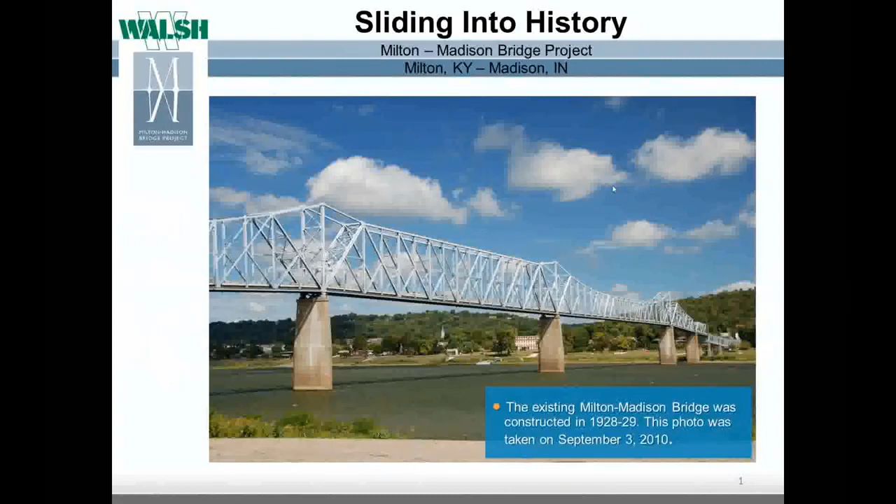As we all know, this was the existing bridge built in 1928-29. We've all seen this picture, but I left it there because I'm going to have an updated one at the end here.

What a way to start a project. We began the project in December of 2010, and it turned out that 2011 was the wettest year on record along the Ohio Valley. The project experienced 8 flood events in the first 14 months, and Walsh lost approximately 240 days to high water conditions. Normal pool was right around 420. For the contract, ordinary high water or a flood day was set for 432.2. And this picture right here was our highest water level, which was Easter of 2011 at 456.

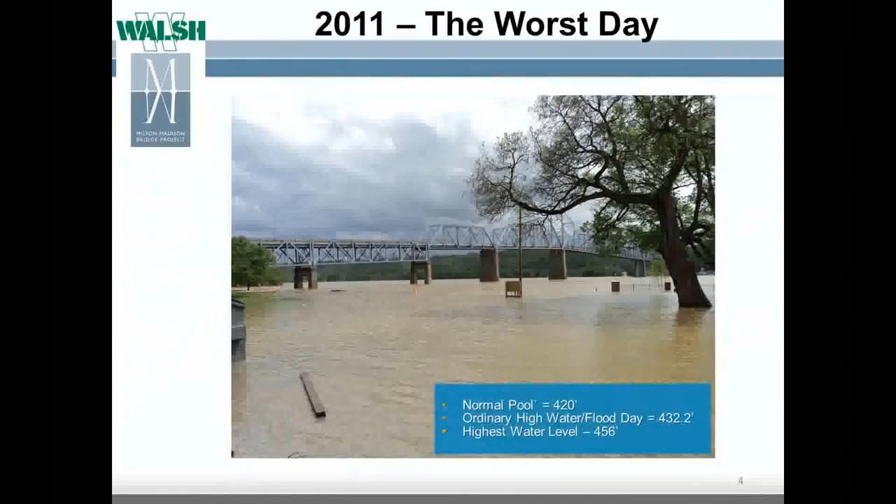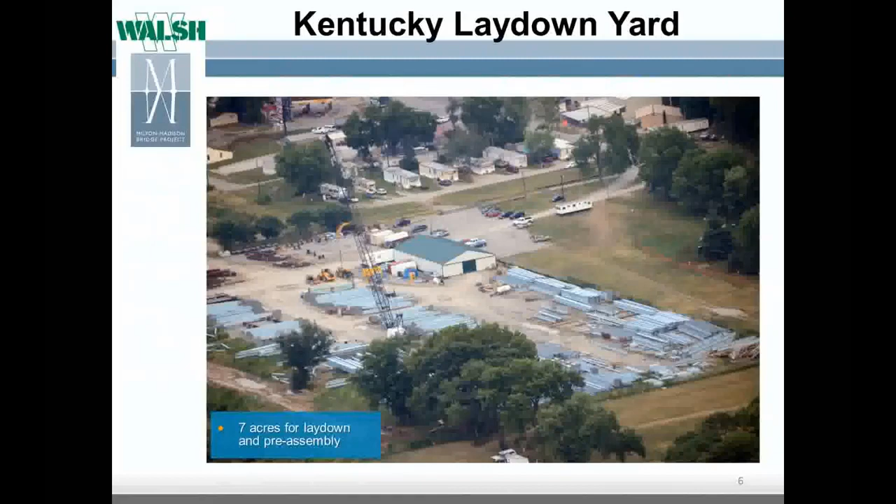We've seen pictures of the cofferdams in the previous presentations. Because of the limited headroom, we could only drive sheets that had a top elevation of 435. So if the water was coming up and we knew it was going to continue to rise, right around 430 was when we had to take our equipment and flee it until the floods receded. So we were limited somewhat by the height of the sheeting as well as the flow of the river in our working.

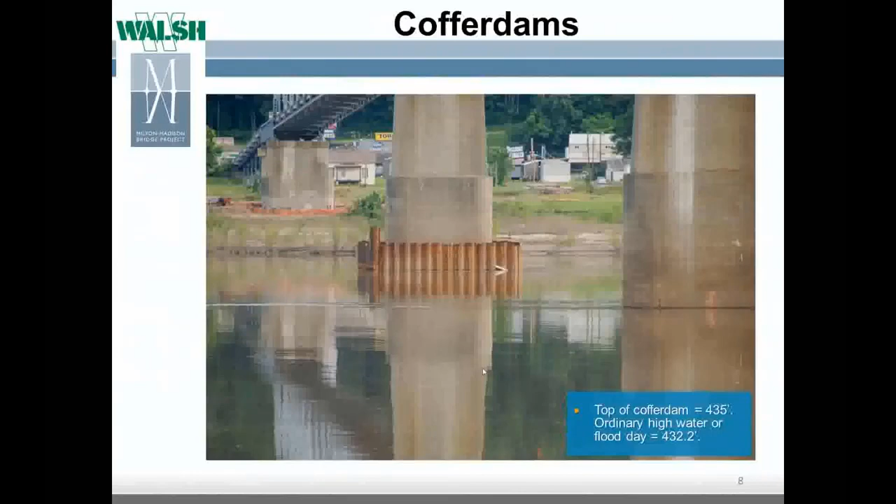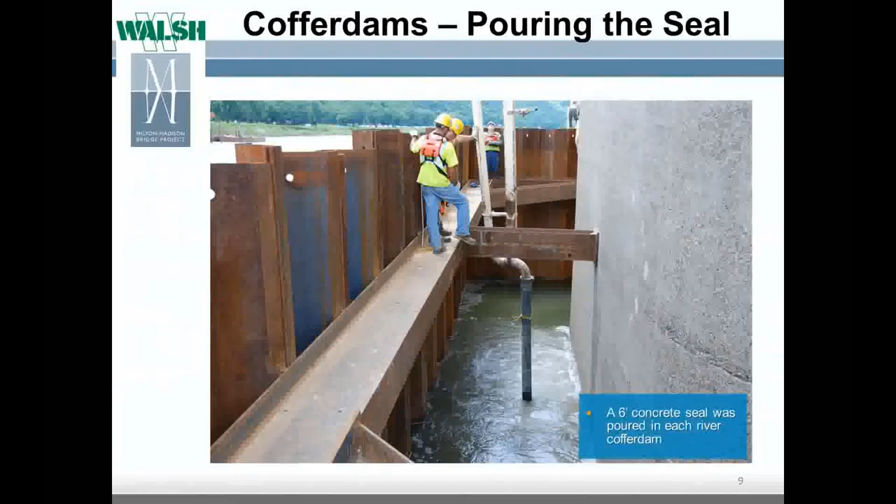So we actually had to set up a test. The test was specific to the contract. But what we found was unique: no one in this part of the country had ever tried to pull a bundle of bars—single bars, yes. So we had to reach out and get some specialty wedges built in order to pull a bundle. We were also told by the grout supplier that in order for the grout to have the necessary strength, we would have to roughen the edges of the hole, which did not sound like a cheap proposition. During our testing, we roughened some holes and left some slick from the coring, and as it turned out, there was no difference in the bond strength between a roughened surface or a smooth surface.

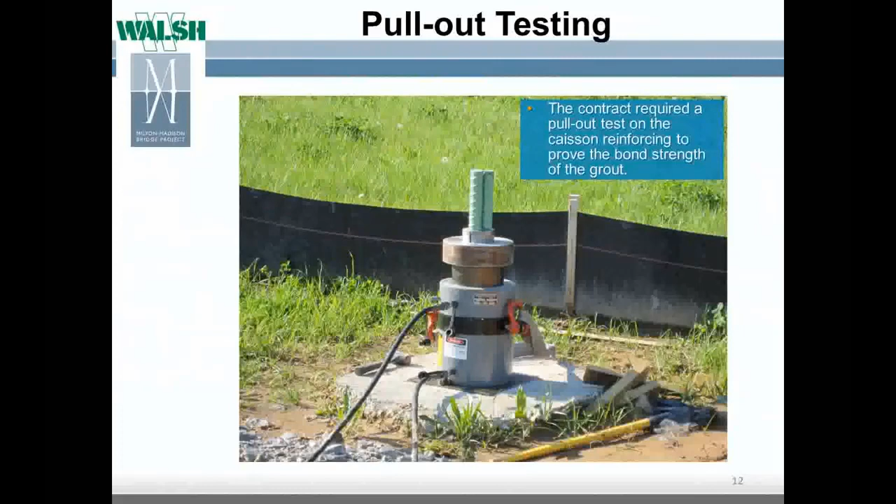This was mentioned earlier by Travis, the number 7 epoxy-coated resteel shear connectors. There were over 7,000 of them drilled and anchored in the existing piers that were strengthened. Also talked about the reinforcing steel—a couple of pictures of what the steel looked like in application.

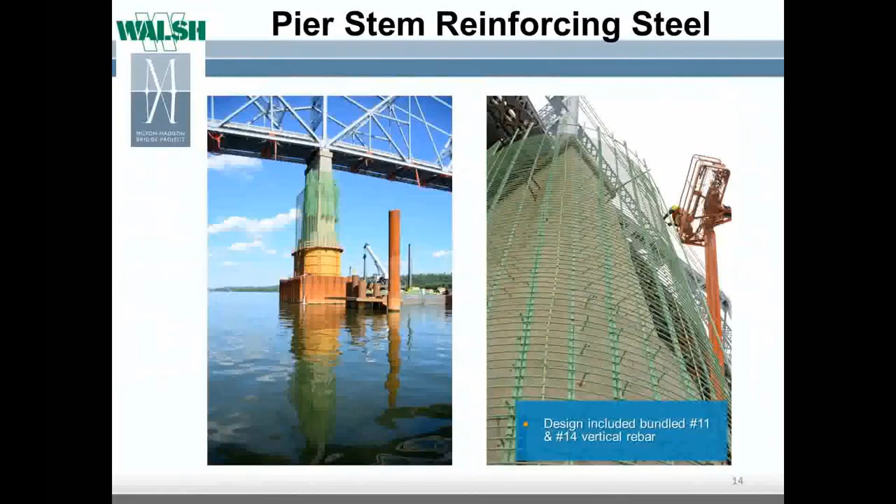Our forming system was an EFCO forming plate girder system. We poured 20 feet at a time, and each time we would break it apart, clean them, and then jump them up.

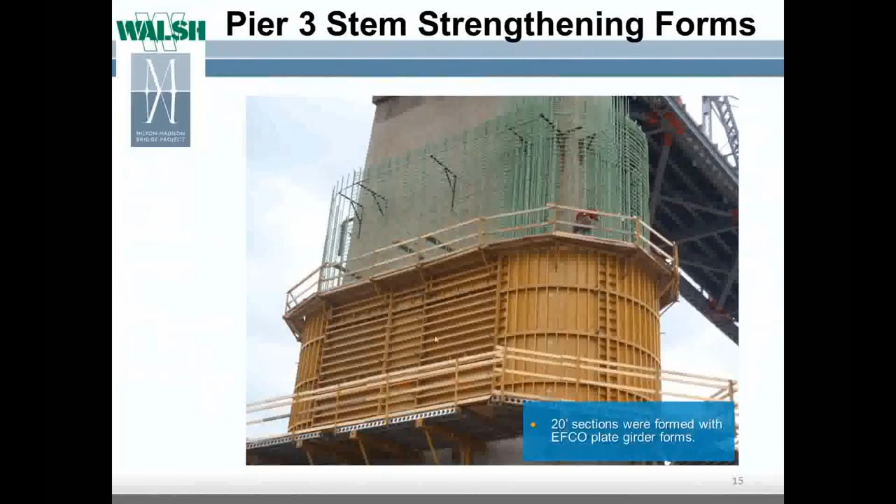Once the concrete got more than 4 feet thick, we were obligated by contract to use mass concrete thermal control measures to monitor the cure of the concrete as it related to heat distribution.

Here's a picture of a completed pier with the pedestal steel standing tall above it. The concrete thickness varied in the jacket from 2 foot to 6 foot.

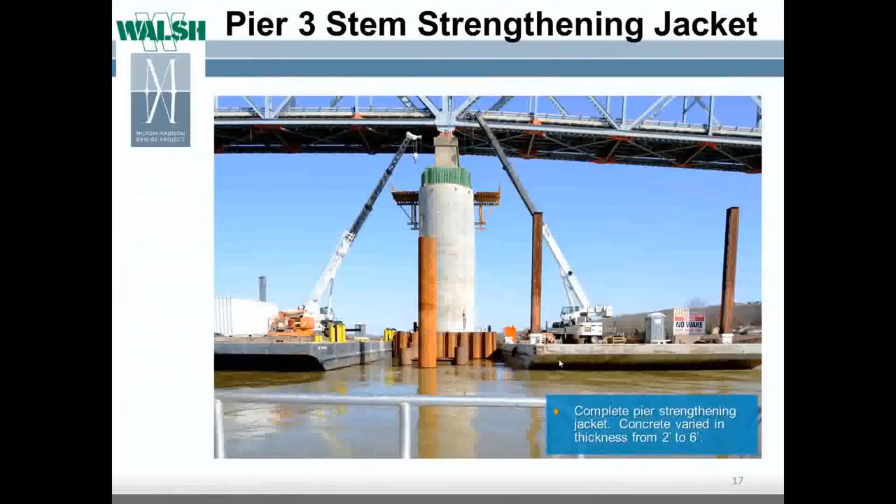Travis talked about the temporary ramps. Here's a good cross section of what the ramps look like. To expound a little bit on how these were anchored to the beams, we use a standard carriage bolt and what they call a lug C washer, which is bent in such a manner that you can reach through the timber and grab the flange of the beam below it.

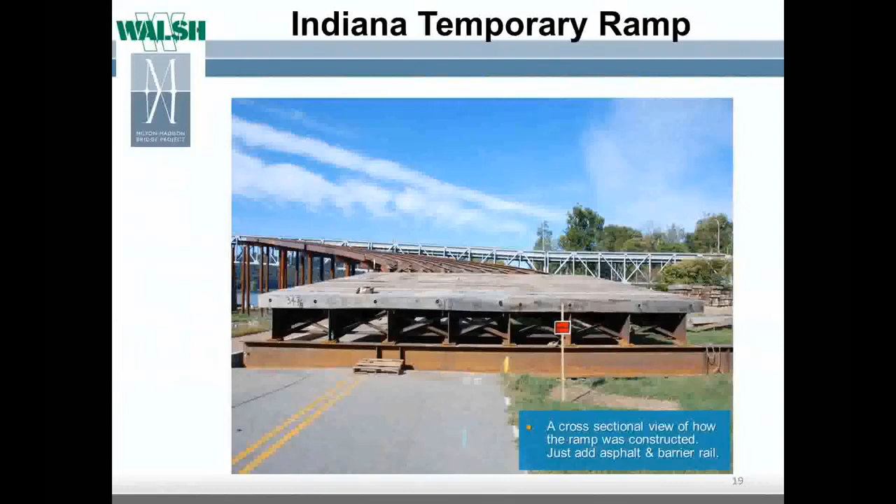They're used for docks mainly, and they held quite well. Just another view - we use 24 and 28-inch pipe piles to support it, and you can see the stringers underneath.

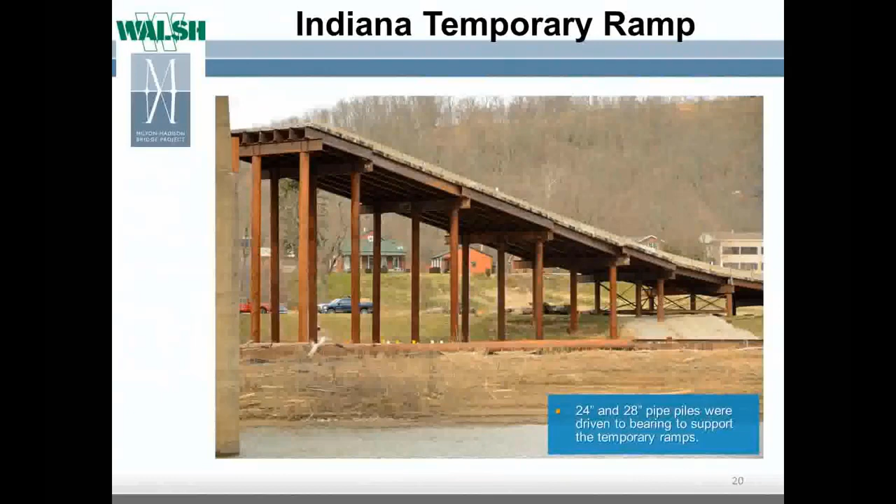Just another view prior to paving that section of it. And portions of the Kentucky temporary ramp was an earthen fill.

One of the key elements of our first closure to connect these ramps was getting sections of the old approach spans out of the way.

In order to expedite the installation of the remaining section, we actually drove the support piling on the outside, and you can see the piling right here that will accept the cap beams for that section that remains to tie the ramps to the old truss. We hurried our demolition contractor along to remove the deck off this portion.

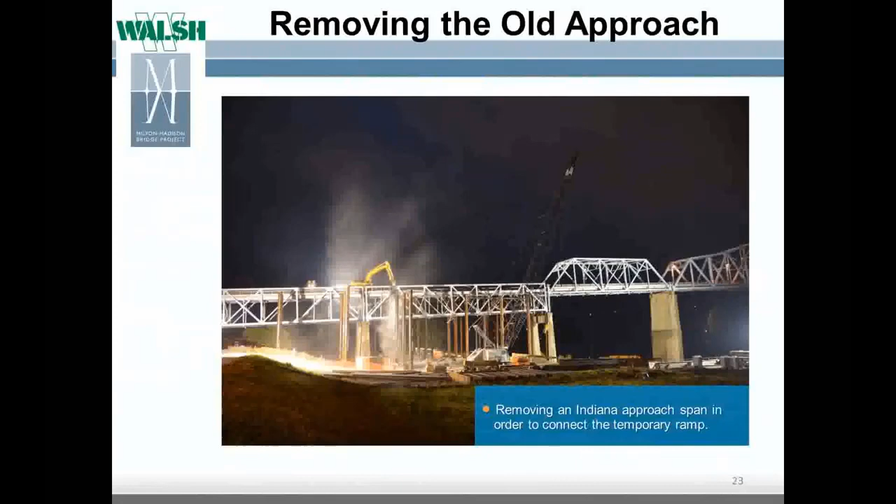You can see him shortly after midnight of the night we closed it, hammering the deck down. And then the next day, about 1 o'clock, we actually had that section fired and dropped. The demolition expert dropped it straight down, it did not hit any of the piling, and that allowed us to go right to work on setting the cap beams.

Travis used this picture previously, but we had to install the cap beams, the stringer beams, timber mats, concrete barrier, and place the asphalt. We did this, and the closure was only 3 days before we could put traffic back on the existing bridge.

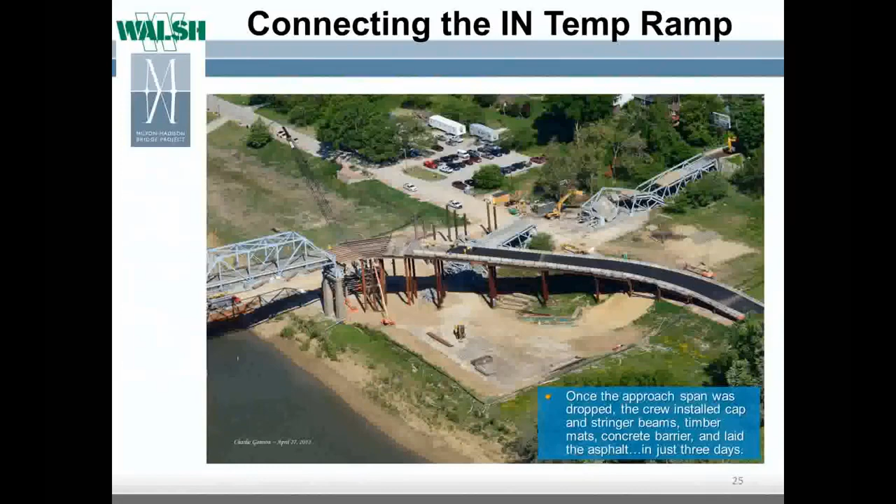Here's a picture of the work on the Kentucky side showing the installation of the stringers. There'll be sections coming back this direction to complete this.

We finished asphalting in a heavy rain at midnight in order to get it done without being charged a 4th day. It was prom night too, and the people in Kentucky were happy they didn't have to drive over an hour to get the kids back home.

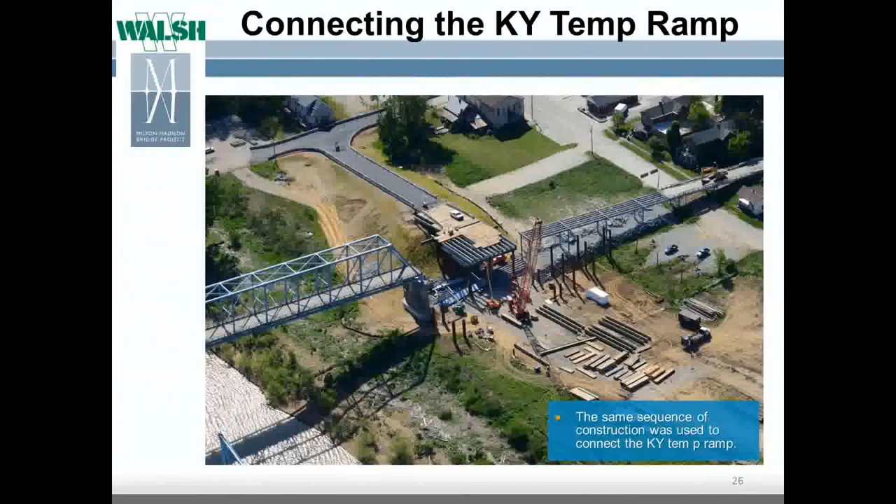We had weekly maintenance where we kept bolts tightened and checked for any other issues. But the ramp system worked very well.

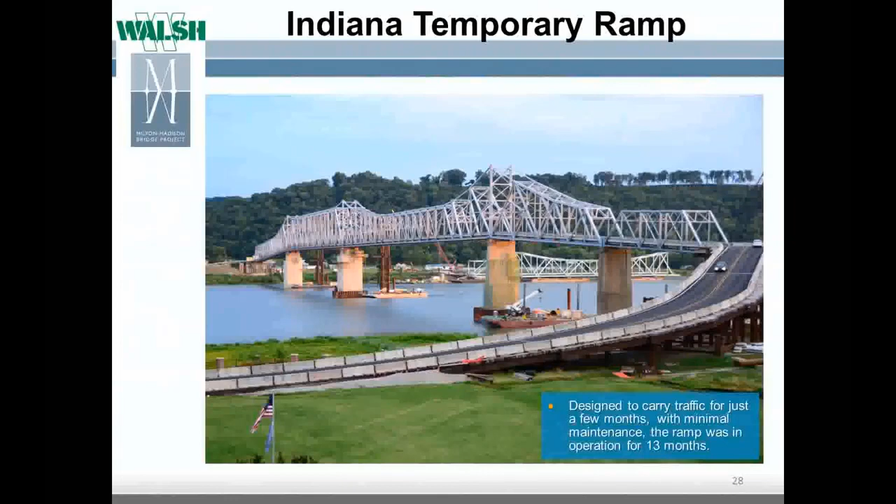During that time, we began the pre-assembly of the truss. Part of that was lashing big jumbo barges together and setting up what is called a grillage system to support the truss. It was very important that everything was surveyed in to be exactly within a quarter of an inch to allow the truss to be properly assembled.

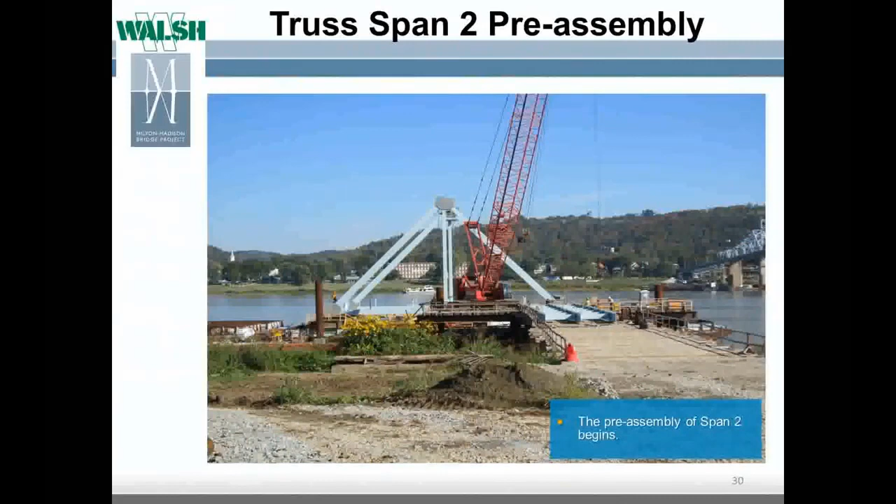The crews did a very good job with this. This is a shot of the first section of span 2 being assembled on the barges, and we fed that operation by some float trailers within the yard.

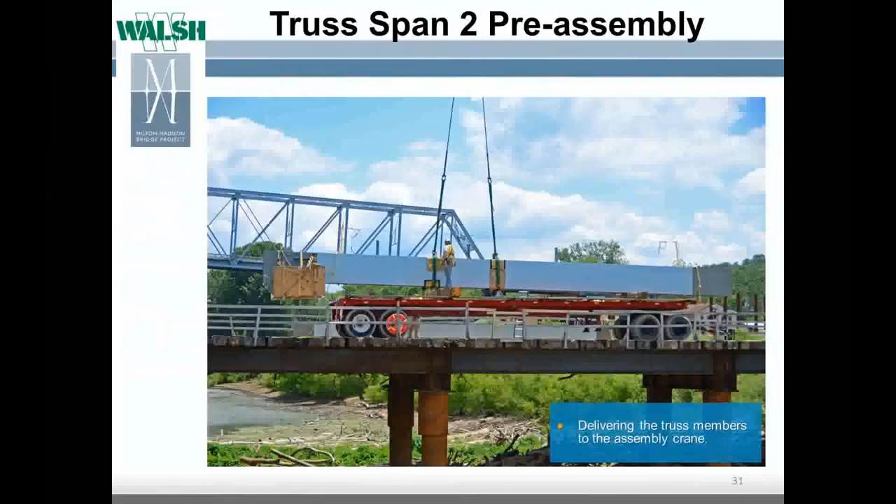The next members we loaded up and pushed out using a big loader to move the float trailers into place. Just a point along the way of span 2 being assembled. For the most part, we used aerial lifts setting on the barges for the iron workers to access the connections. It works quite well - you can see the aerial lifts all over this barge.

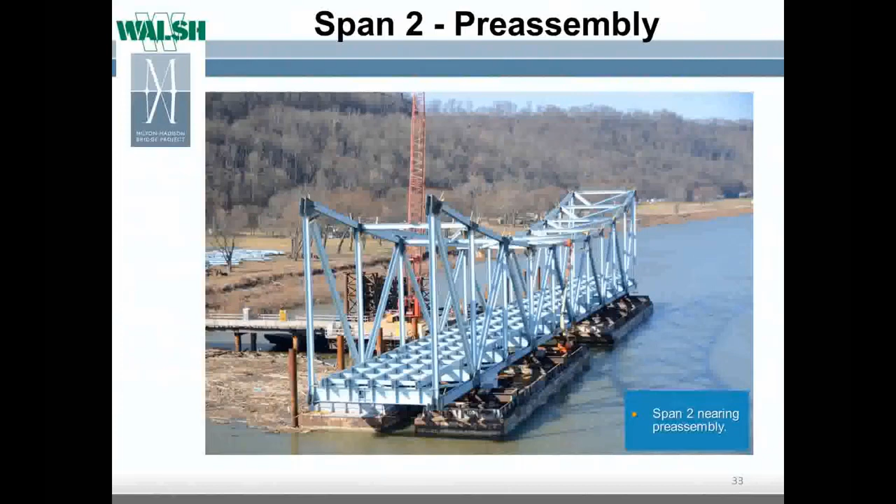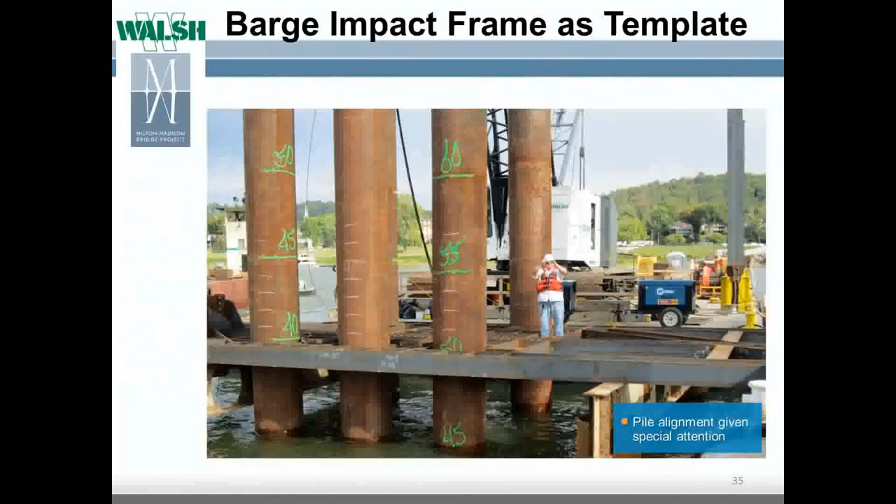At the same time, as described in the previous presentations, we were out driving the piling that would support the temporary piers. Pile alignment was important, that's why we used the lower barge impact frame as a template.

The pipe piles were 36-inch diameter, 1-inch wall thick. We drove using a D100-13 diesel hammer, for those who understand diesel hammers, and we had to achieve a minimum of 2,900 kips.

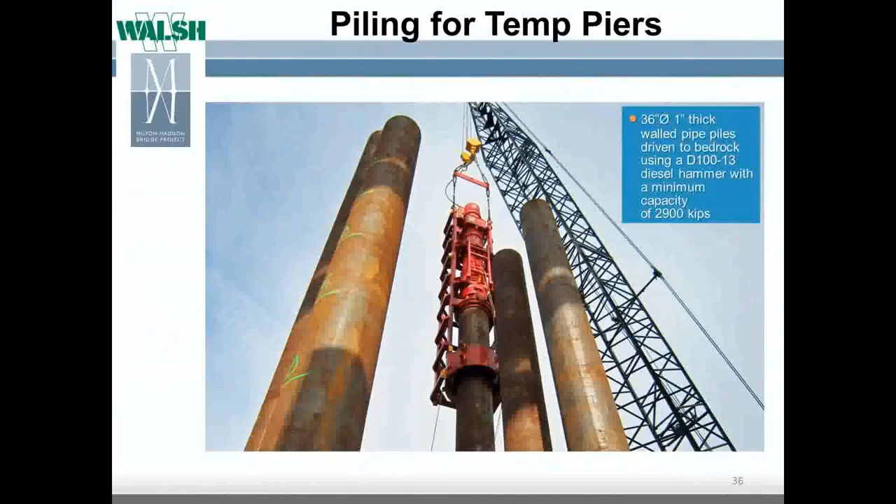At the same time, we were pre-assembling the temporary piers and getting them into position ready to set. These are the workers adjusting the 4 legs for the tower to go ahead and be able to set that as soon as these were ready.

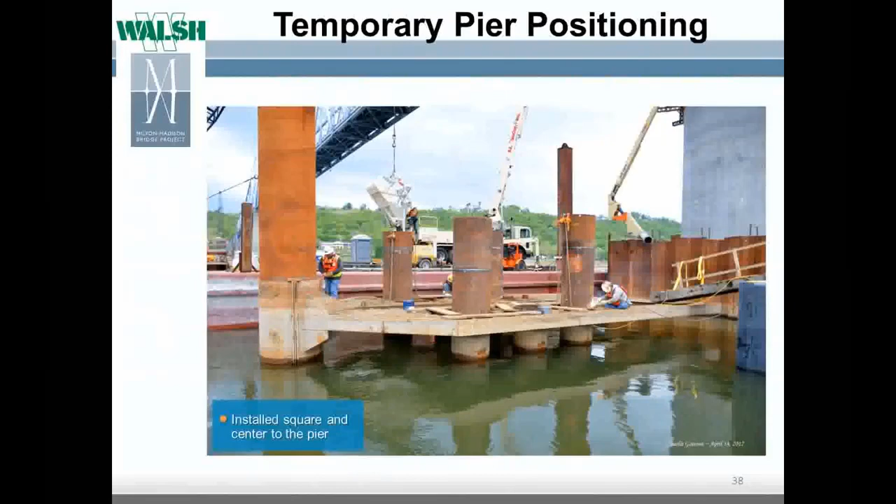Temporary pier construction. This part shows a section being set on top. I should note that the lower sections were filled full of sand to help with the stability of the pier, so that was an operation in its own. And then this is what the pier looked like at this stage.

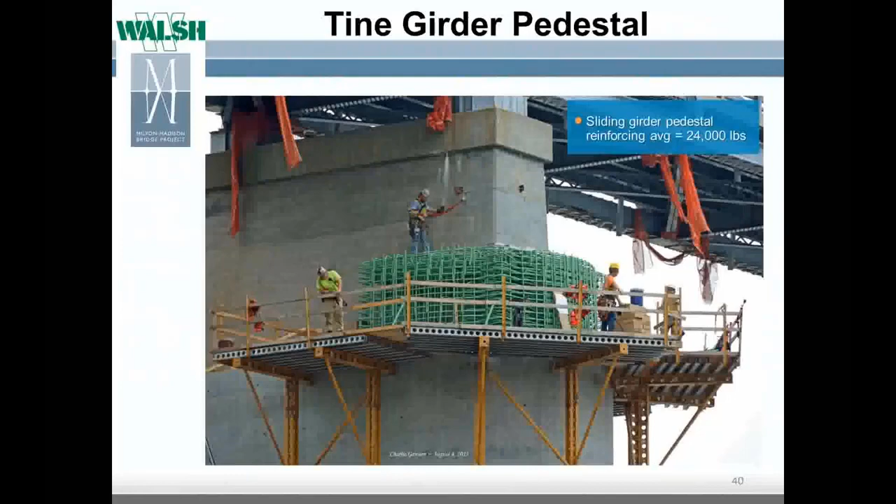Here's the crew forming it. It was a very uniquely shaped one, so it took some creative form work to get it ready to pour. Once completed, you can see some of the V-strips, and there's inserts in here to accept some shear connectors, just to tie all this massive concrete to the permanent pier once it was poured.

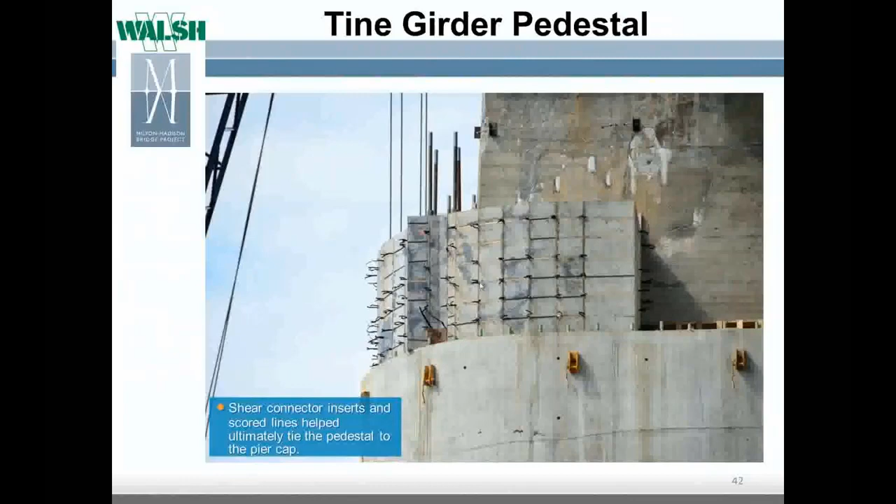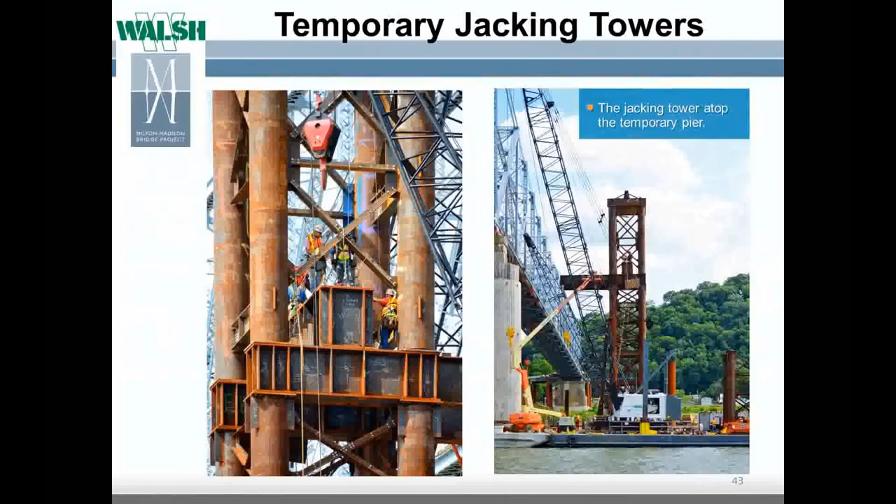So here's a picture of the towers in place, both at Piers 3 and Pier 4. At the same time, the pedestal is being formed. A lot of activities had to go on at the same time to make up for lost time from 2011. Here is an installation of the jacking platform bent that Murray talked about.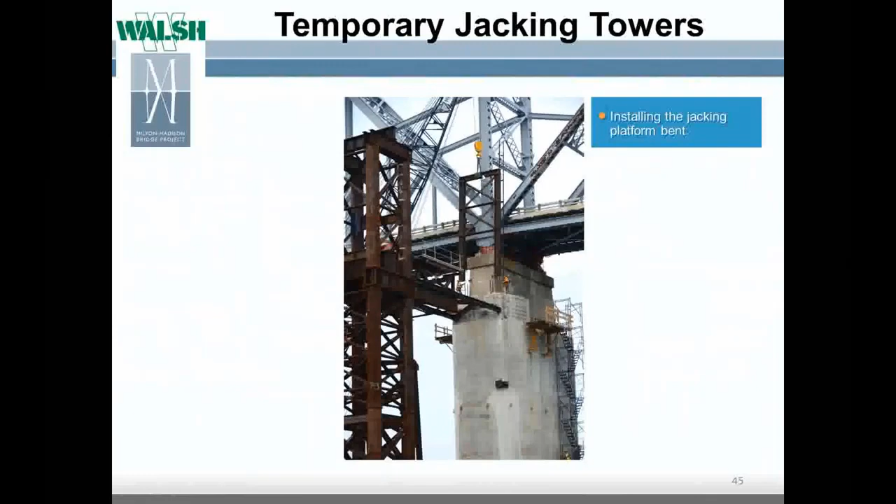Here is the assembled tine girder assembly, staying on the ground, ready to be lifted, put on a barge, and carried out and installed in place. The position of this was very critical for obvious reasons. And here you can see this being set in as a single piece.

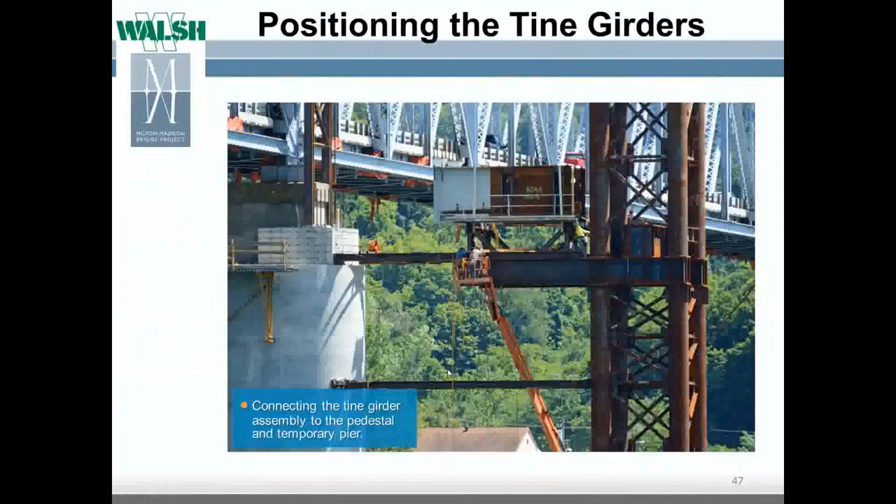Seeing this picture in the last presentation gives you a neat perspective of the opening that the girder would slide in. This right here, and the one below, were what we call the blocking beams that allowed that girder to be cantilevered while they were shifting the rigging to slide it on in.

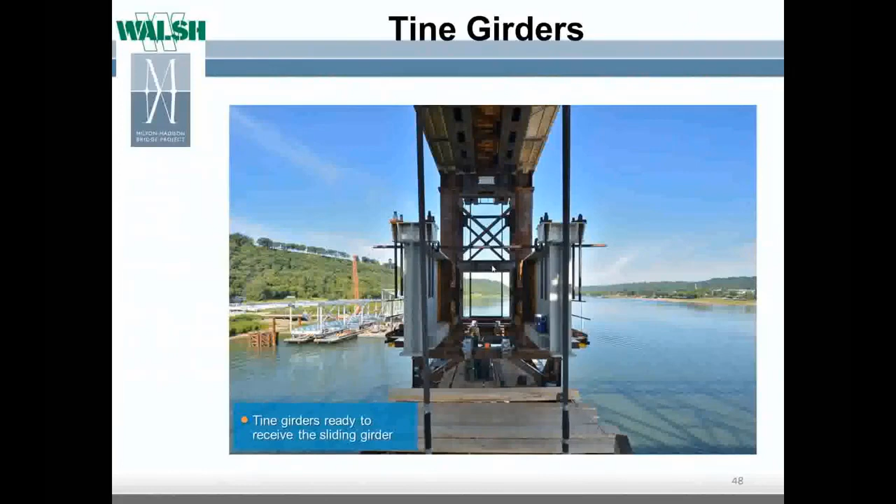Here is the positioning of the jacking platform. It's going to set atop the jacking tower and the jacking bent. And here it is in place and being bolted by the ironworkers here.

The next step was to connect the lower barge impact frame to the pier. You can see we've taken out the end of the cofferdam here in order to make that connection. This was very tricky in that these were surveyed in and cored and fastened to the outside of the pier stem while still inside the cofferdam, and then make sure that we made it up correctly with the legs coming out here to the barge impact frame. For the most part, it worked pretty well.

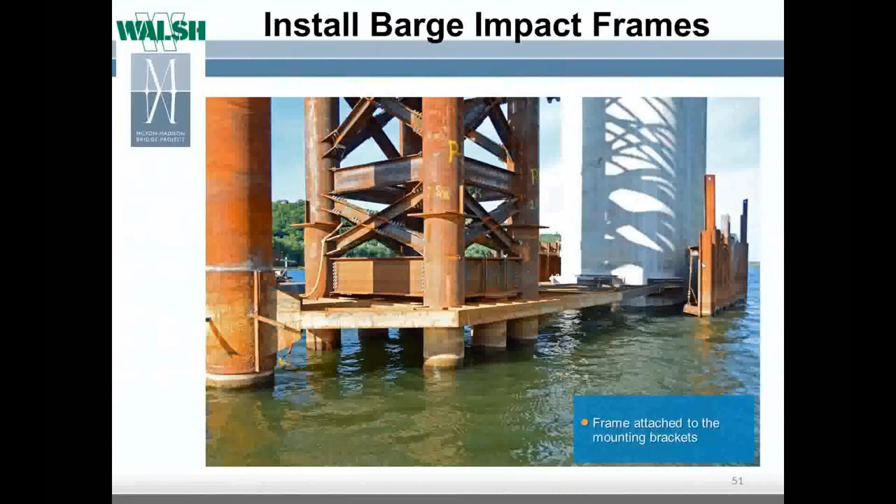Here are the 350-ton jacks ready to have the strand jacks, the strand installed prior to lifting to the platforms. Here is a view of one of the strands. This is altogether 5/8 of an inch in diameter here, all 7.

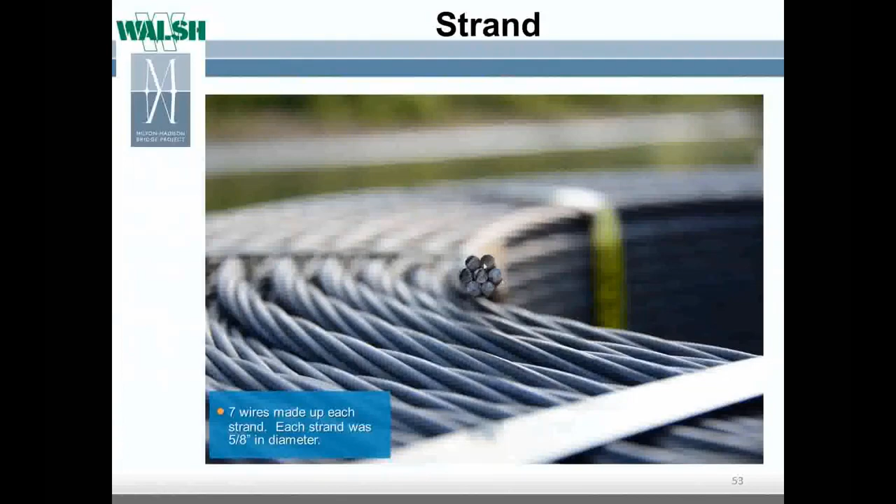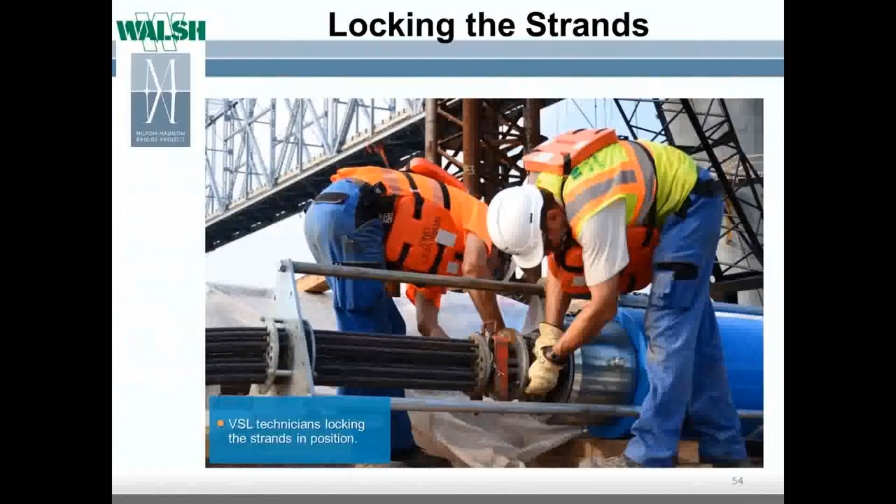And they would be pulled through the jack one at a time, locked into place on the ground. Here's a picture of the wedge assembly, part of the lifting itself. You can see the wedges in here that would grab hold of the strands, either to pull it or to hang on. Once the strands were fully installed, they would lift the jack and strands up onto the platform.

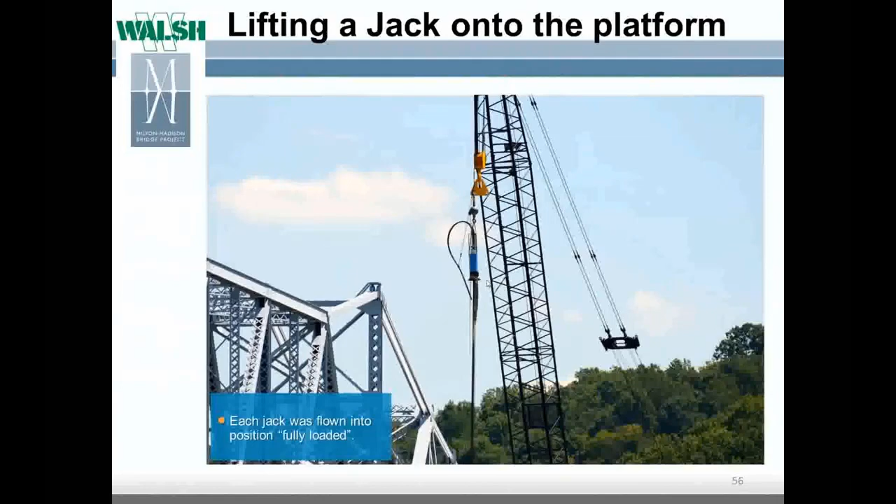And in this case, this is Pier 3. All 4 jacks would be readied. You can see the control lines all coming up to a central manifold that ran the jacks.

Murray talked briefly about these yoke assemblies that were used during the strand lift. These were tricky little things to install. Rigging is one thing, but keeping them in place until you could get them anchored was another.

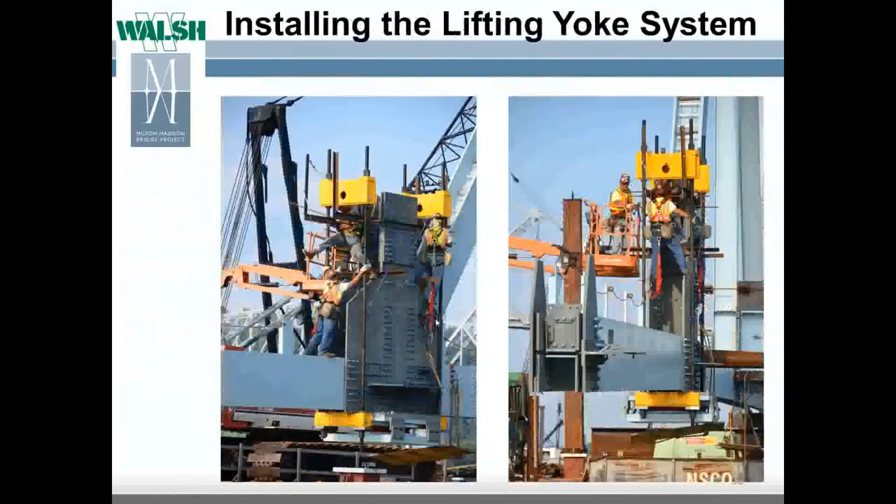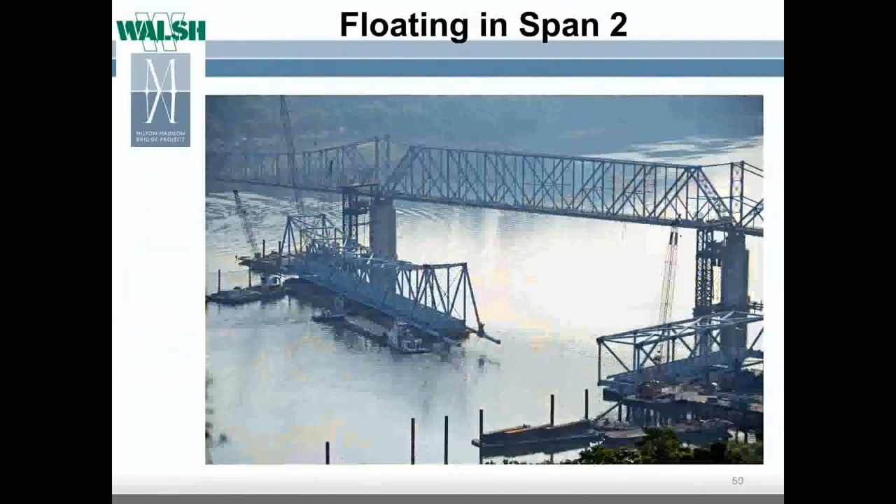Once span 2 was ready to lift, we began the float in at daybreak. And this is just a series of photos of the truss being positioned, ready to lift.

We floated in on a Monday. It was an equipment issue. We had to get tugs, and they weren't available until like 4 days before we wanted to lift. So we went ahead and brought it into position, and it sat there until Friday before we started the lift. But it was a very slick operation moving this into place.

Span 2 weighed about 1,700 tons when it was lifted. This is about halfway up, probably to the point that Murray described where the lower leg had to be brought up to support it.

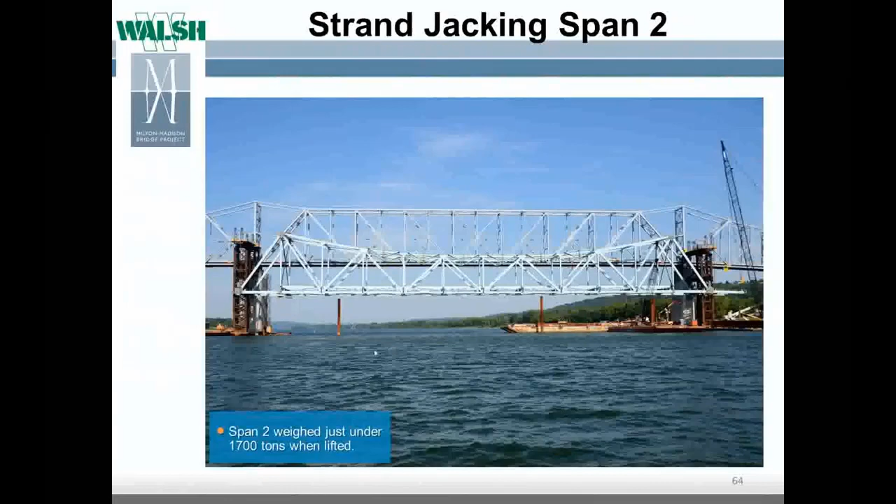Here is span 2 all the way to the top. And now we bring the sliding girders in. Another shot of how it was brought in and connected to the tines. Here again, you can see the size of all this work based on the size of the workers here. And this operation went very well in the 3 times that we did this.

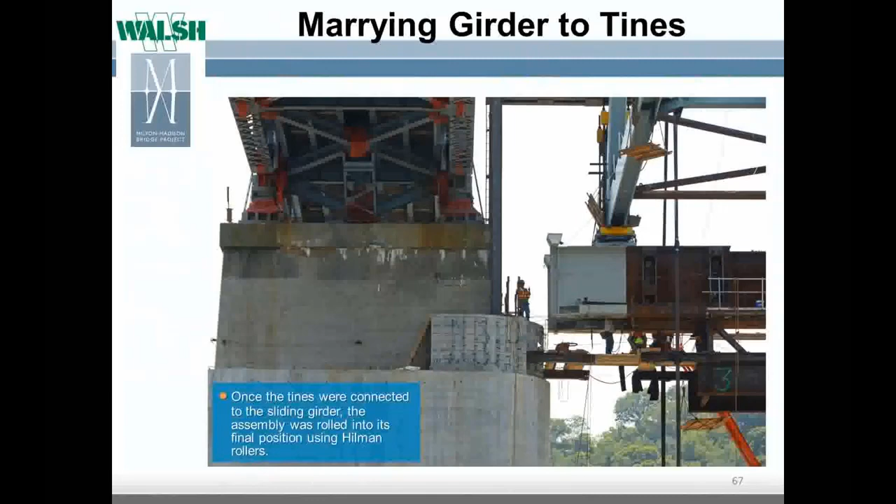You can see the married-up tines and girder being rolled into place using Hilman rollers. And then here it is in place, ready to set the bearing down, and you can see a tie down right here that has the tines secured to the pedestal itself.

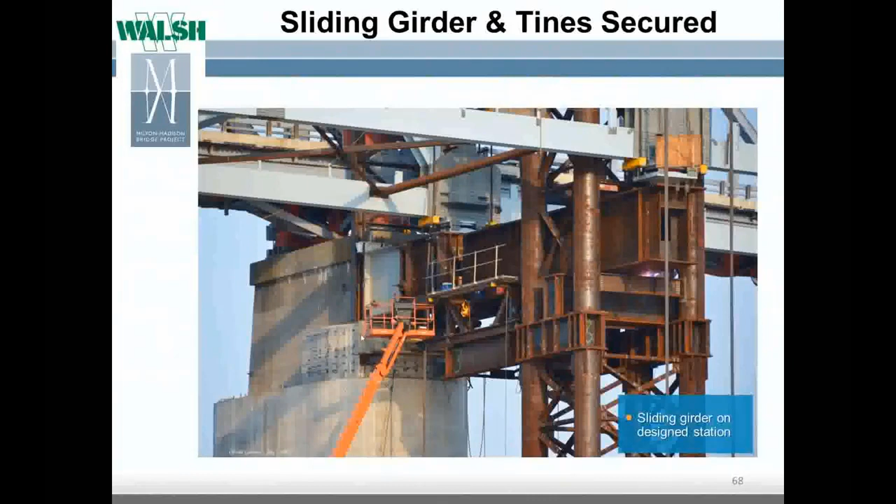Same operation for span 3. It weighed 1,900 tons at lift. We started that float in at midnight. We only had 24 hours to have the main channel closed, so we started the float in slightly after midnight, and by 7:30 that evening we had it up and secure where we could reopen the channel. That was a very successful day for us.

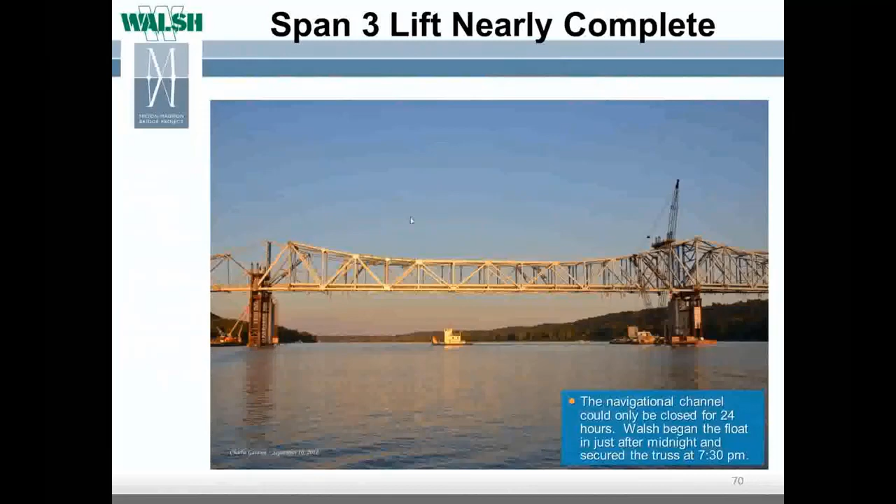Here's a picture of span 1 being erected in place, stick built as we called it, and it's cantilevered out, and you can see workers here working on the connections.

Both spans 1 and 4 used conventional stick building. These are called floats. The iron workers would build these and they could move them from one location to the other as a work area. And yes, both of them are tied off in 2 places.

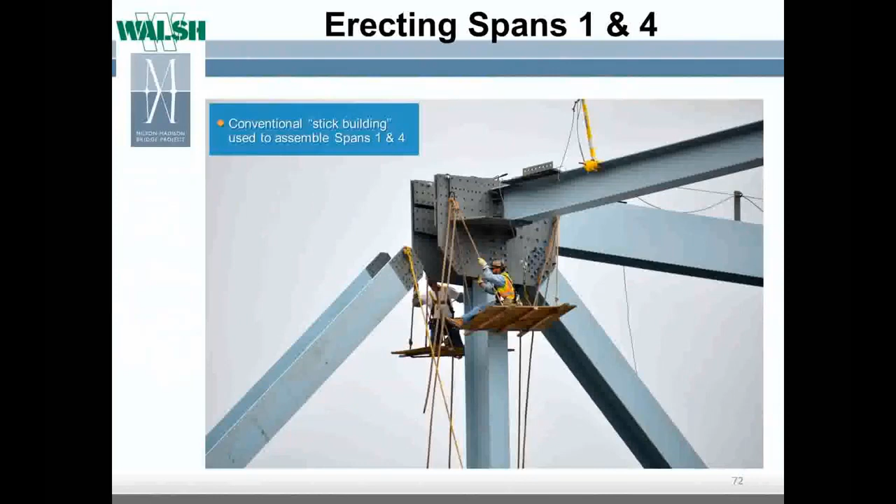Here's another group of pictures of the workers stick building in operation. Here they're tying a diagonal to a lower chord and they're bringing in the post here and making the connection. That's called hanging out there.

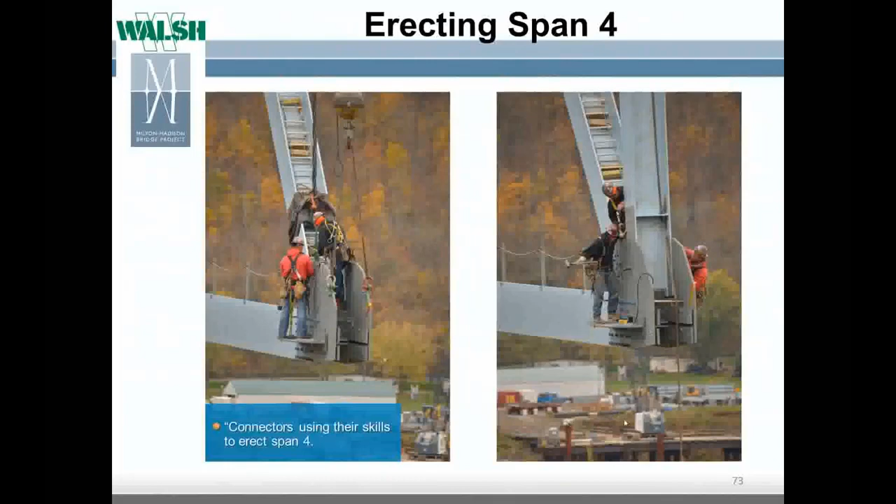Once the truss was assembled, it was time to survey the deck and then put the SIP, stay-in-place forms, down in order to start running the reinforcing steel. At the same time, we're running an overhang to carry the coping.

So we poured the south 800 feet, then the north 800 feet, and then we filled in the middle.

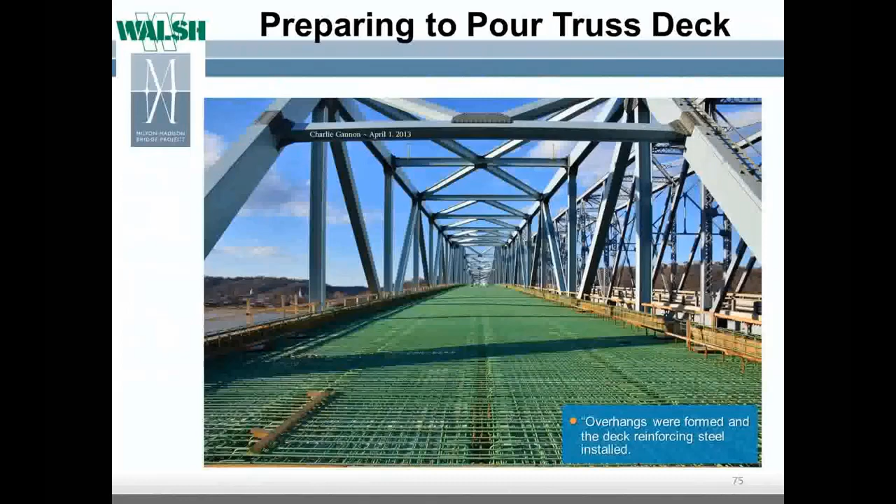We moved the concrete from the end of the bridge out that 800 feet to start with by using a slick line that would pump the concrete out into what is called a spider. It's a little distributor for the concrete. You can see the pipe coming in here. This pivots 360 degrees and it tilts up and down to help move it in a tight area. Very convenient for this kind of pour.

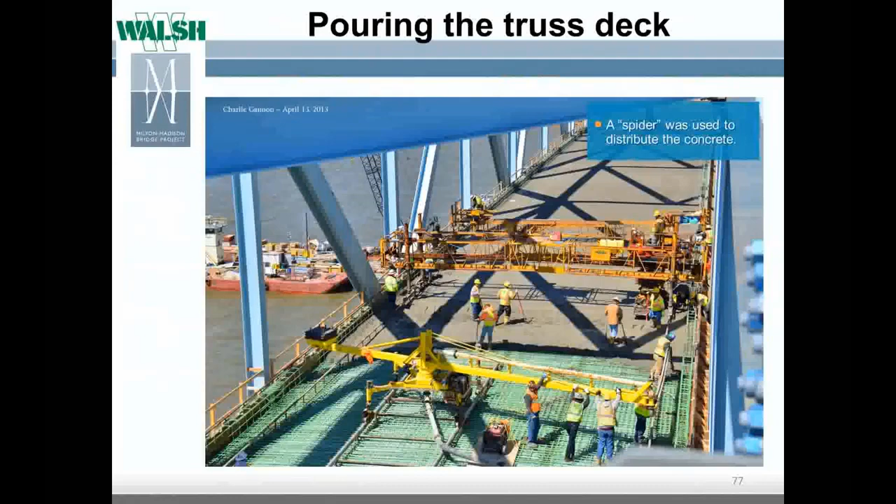So once the deck was poured, the guardrail system installed and stripes put on the bridge, and then we connected the permanent approach to the new truss on its temporary supports with this little transition span. We could open up to traffic. This did not require a closure.

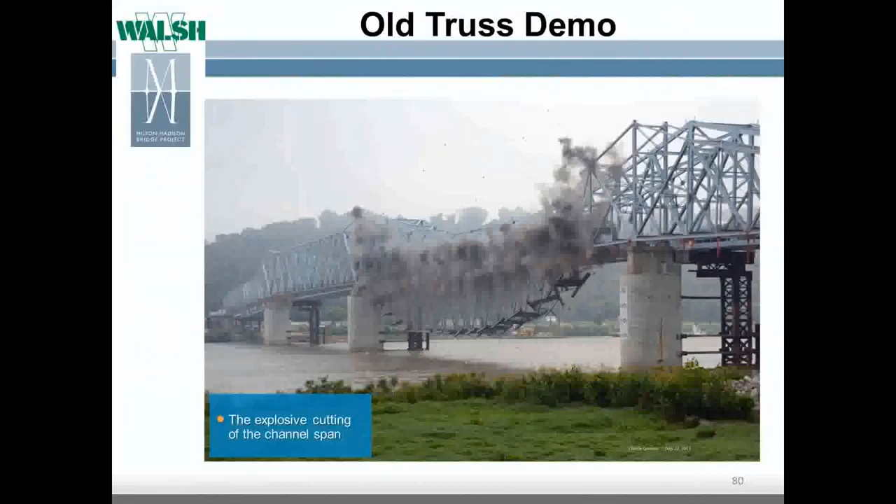Once the traffic was moved off the bridge, it was time to demo the bridge. This is a shot of the first span being dropped using explosive cutting into the main channel.

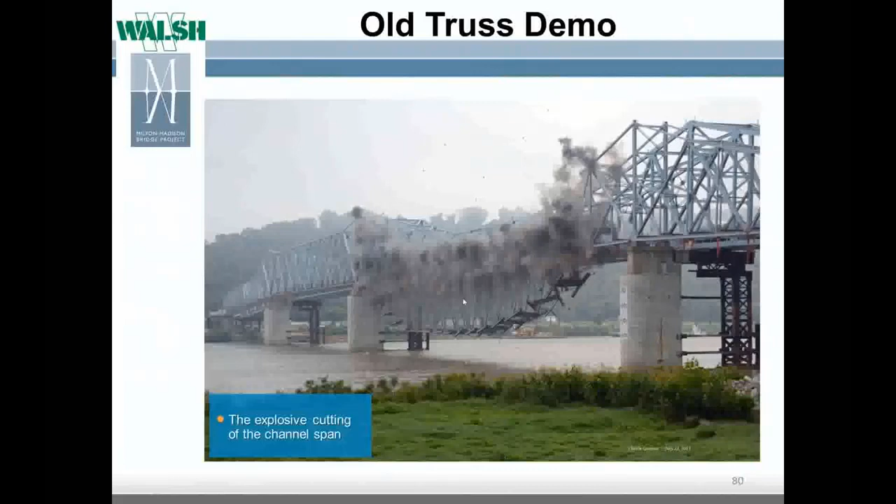And then Murray has a similar picture. This is the second frame of that sequence. The point here is how close we are to the existing bridge and how important it was for this to fall straight down, which it did. But also notice the debris flying in the air. That caused a problem later on.

Once the portions of the old caps were removed, we could go up and start the new cap work. Here again, we used EFCO forming systems to form and pour the cap. There were some one-of-a-kind forms in here for this.

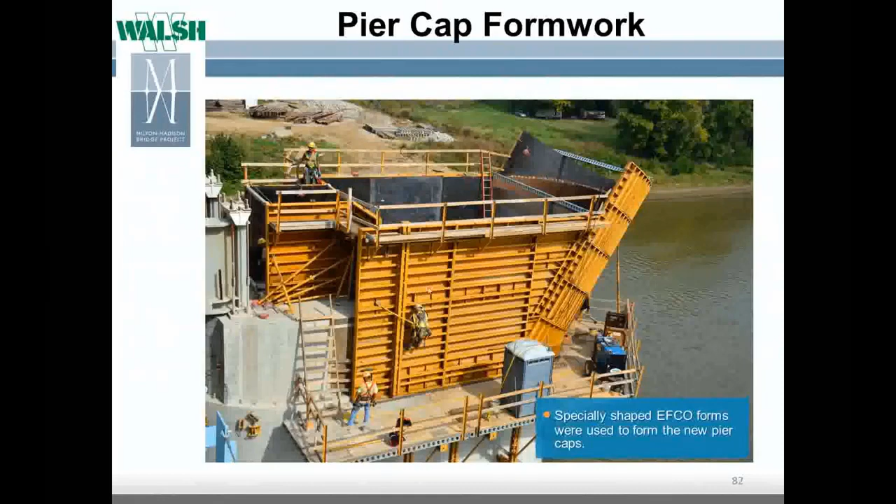We took advantage of the new truss setting there by maintaining some traffic and setting up on the new bridge to pump. This allowed us not to have to use barges like we did for the pier stem strengthening. It worked very, very well.

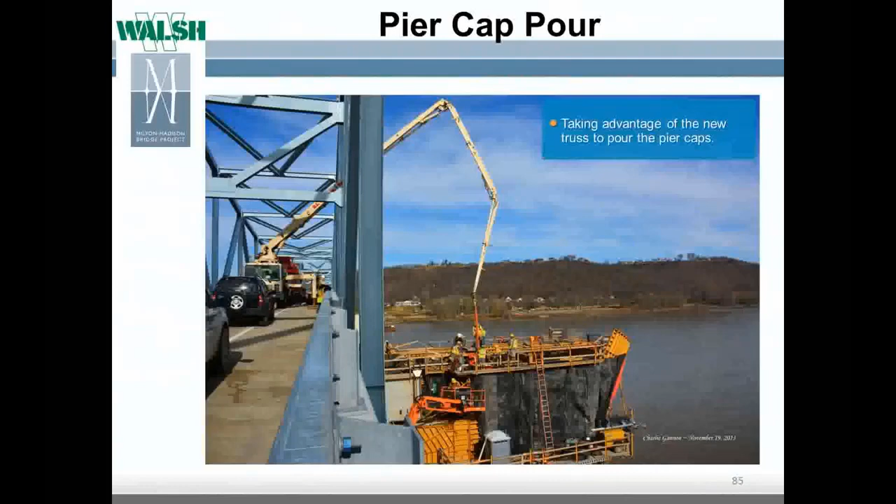Most of the pours started at night, had to do with the mass thermal concrete control measures that we were in, and just the time it takes to pour 700 or 800 yards this way.

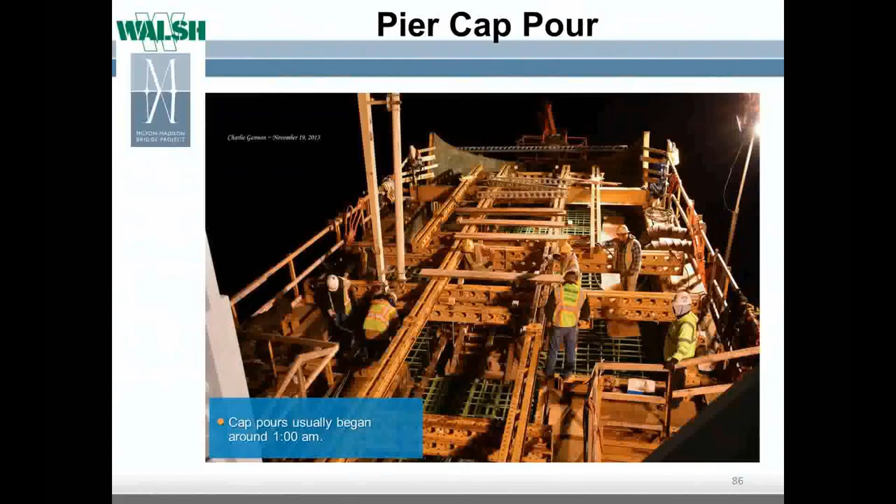And this is a completed section of the pier being ready to accept the slide.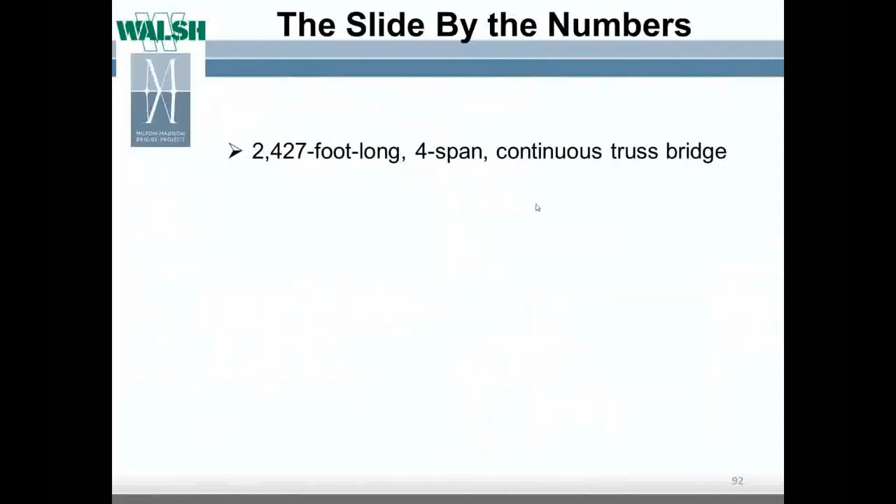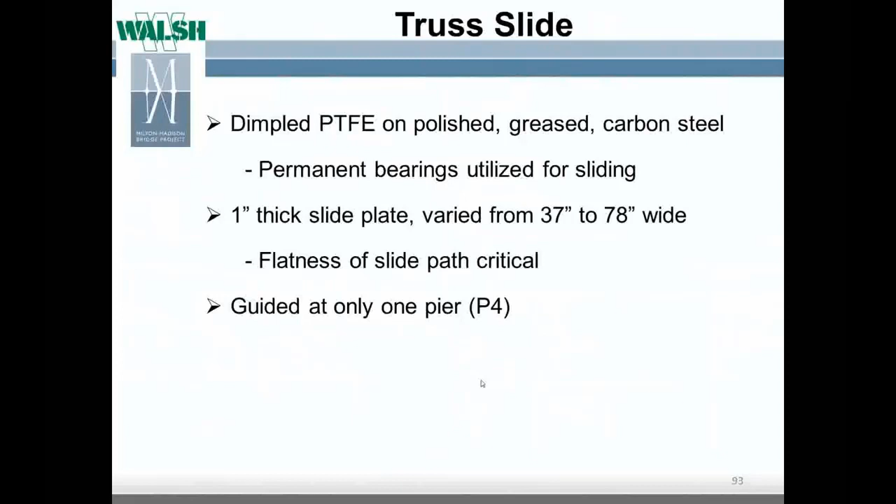Some by the numbers here. Murray touched on this, so we'll move through this fairly quickly. Talked about the dimpled PTFE on polished and greased carbon steel, permanent bearings utilized for sliding, thickness of the slide plate, and the widths. It was very critical that the slide plate was flat, and the whole slide was guided only at Pier 4. The Bravo laser system actually was VSL's, they were our lifting and sliding experts. That was their system to control the slide in this case to keep it in line.

They like to keep things within 3 millimeters as they slid. And then we used the bearing harness system to pull it, and we used the same jacks as we used for the lifting to pull.

Here's another picture at Pier 4 of the jack setup. Murray did a good job of describing this - your jacks, your rollovers, your bumper here already as the truss was coming closer.

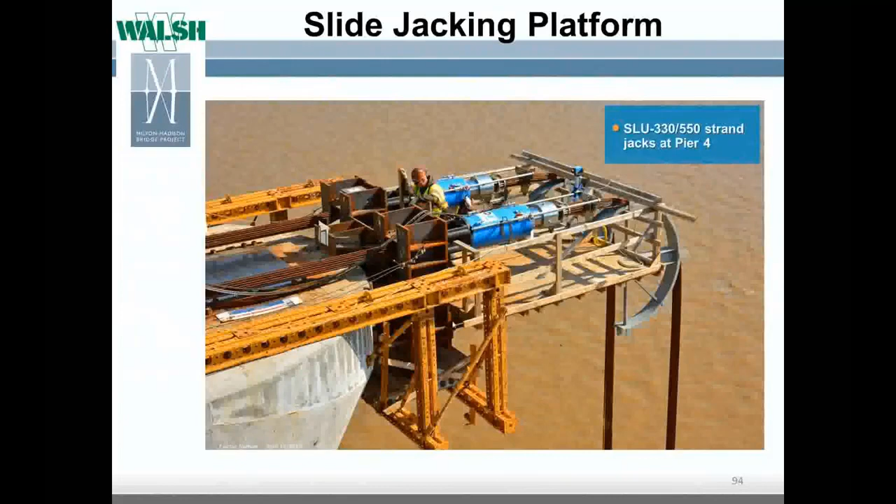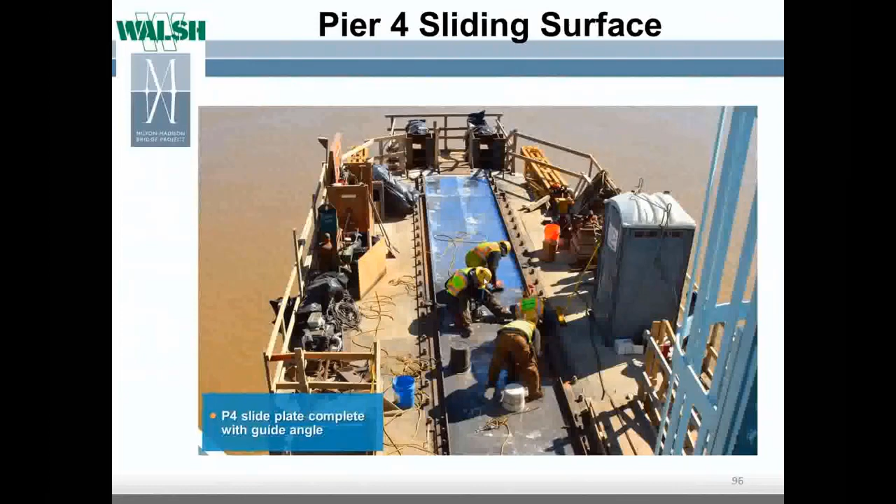Here's the crew polishing the slide path. This is Pier 4, you can see the guides on either side to guide the path of the slide. This is Pier 5, you can see just one row on one side. It basically is just holding the plate in place.

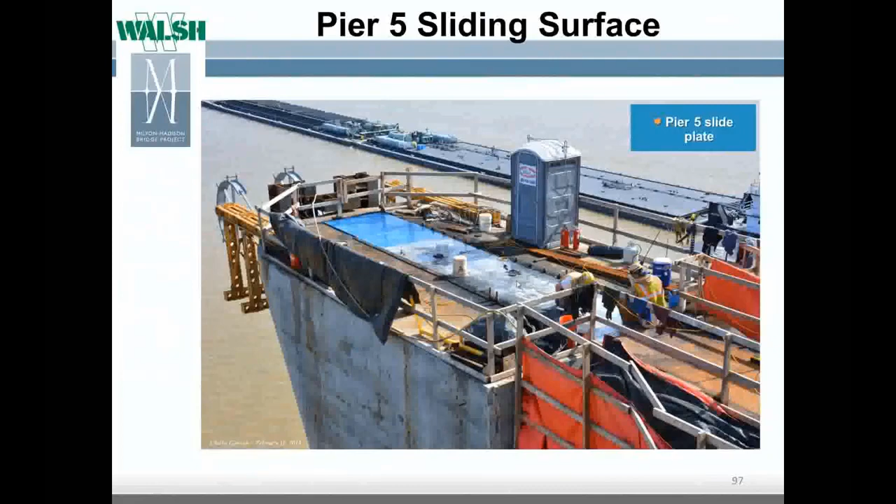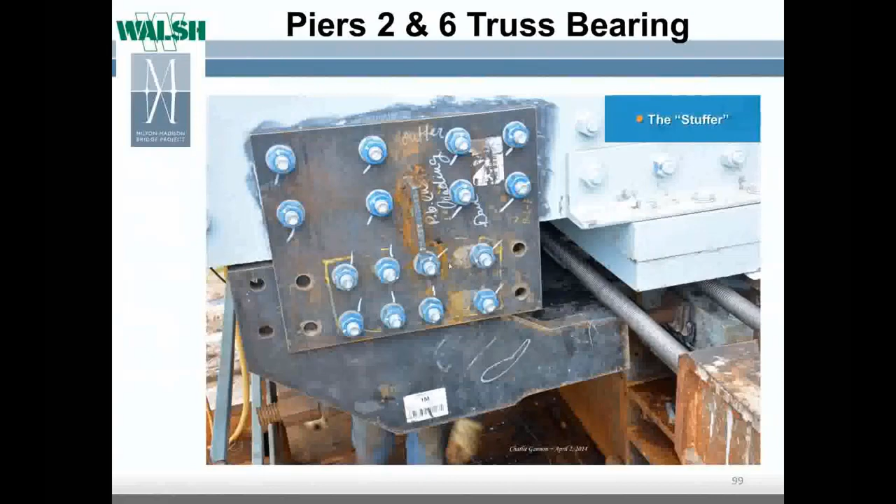No guide necessary here. This is the bearings at the two end spans. They're sloped because of the design of the bridge, and to keep these from wanting to slide out, they created a nifty little thing called the stuffer, and you can see a screw jack affair right in here that could be adjusted to keep pressure against that bearing as we slid, to keep it from wanting to slide out. This became a very interesting little design that was kind of spur of the moment and took a few days to get fabricated and then installed.

This is the lead bearing harness for the two end spans, this Pier 6 as it would be. You can see the strands, and then these tie rods that tie the lead bearing to the trailing bearing, which is the very opposite end, and these two little features are called the skates, and it helped prevent this portion of the harness from wanting to sag a little bit. And this is Teflon sliding on the grease surface.

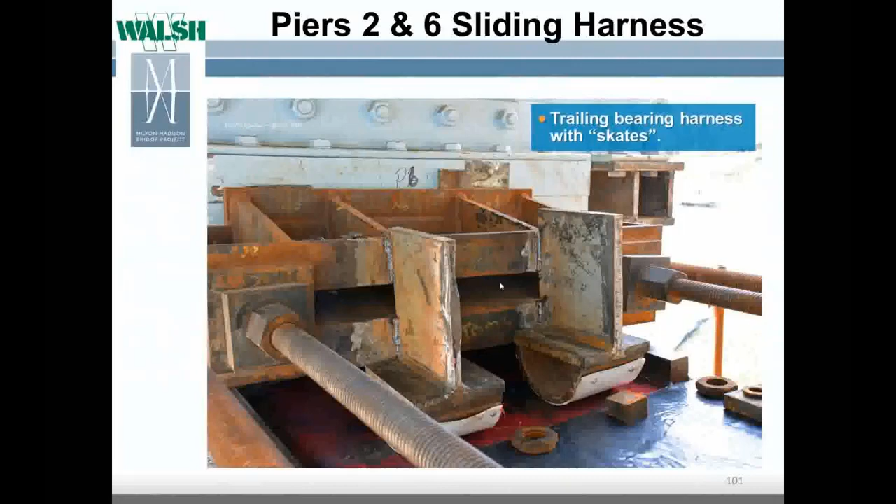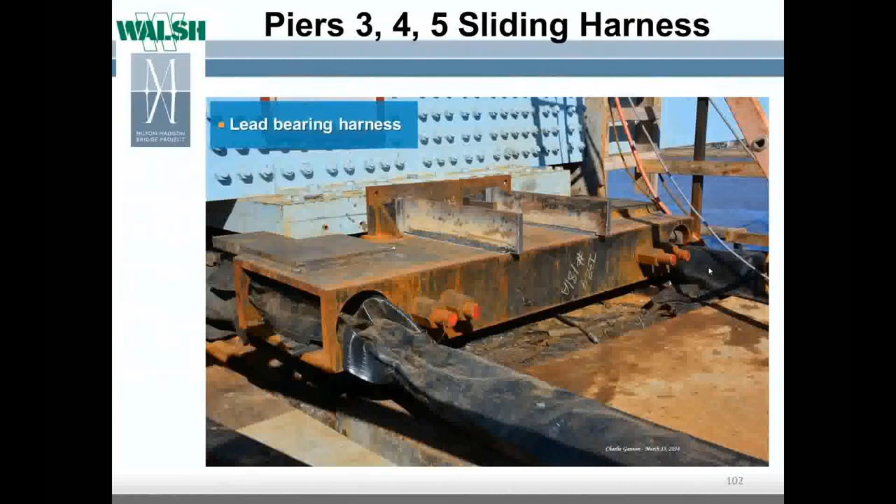This is the lead harness of the three main piers. You can see the covering over the strands, protecting them until we got ready to slide. And this is the opposite end of that - you can see the strands coming in and tied off with these anchor blocks. Then you had threaded rods, big tension rods that went to the rear and gathered up the trailing harness.

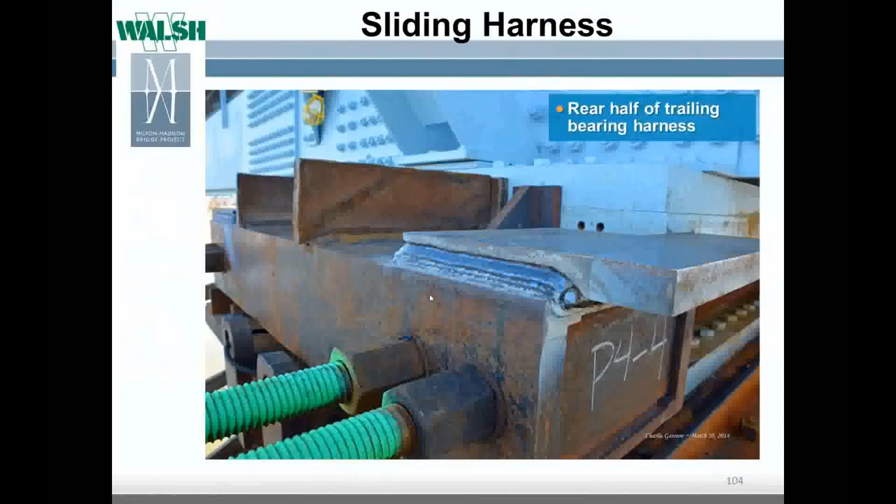And here's workers connecting the harnesses together with the tension rods.

The Bravo system, this is the laser right here, and the target was on the truss itself. Control center, sliding surface - these are our wind brakes. As Murray mentioned, we had to stop the first day because of some wind considerations, and so we spent that evening and then started the next day. When we got ready to slide, the workers would back this plate off 24 inches, allow the slide to happen, and then we would tighten it back down to prevent the wind from wanting to push it.

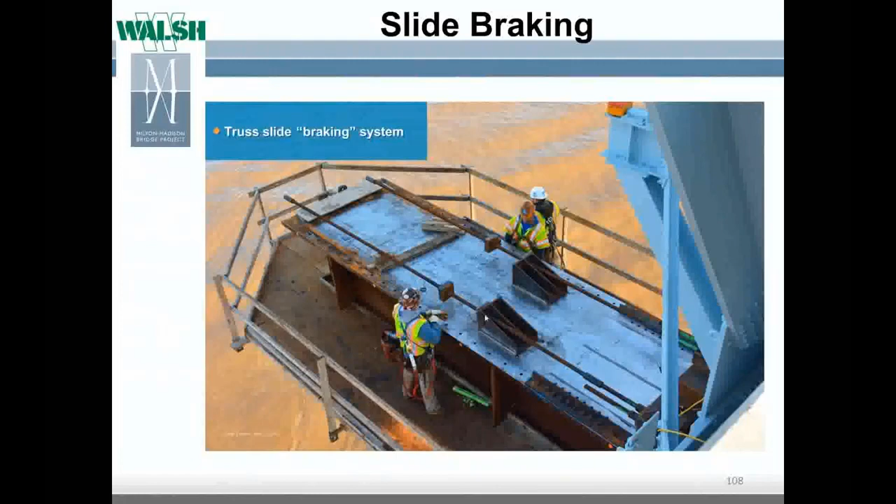This is about halfway across on the first day, and then finishing up the next day with just a few feet to go.

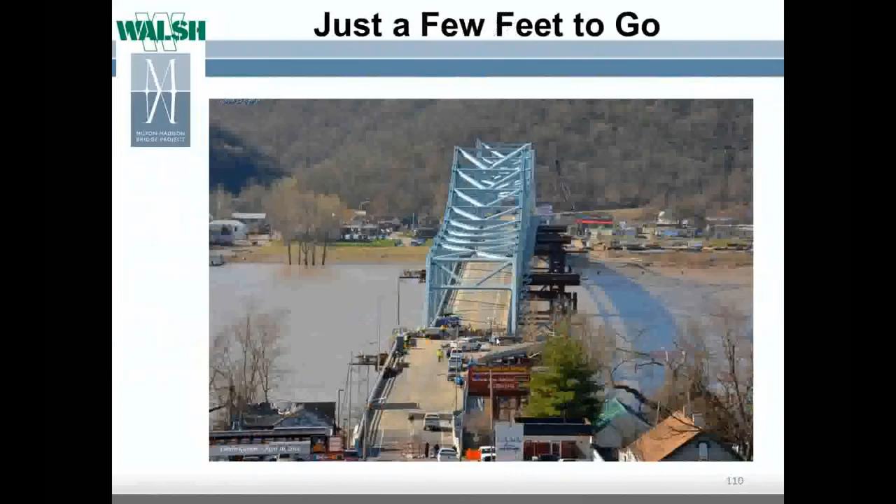About 7 days after we finished the slide, all of the bearings and restraints were installed, and we were ready to open the bridge to unrestricted traffic. But we weren't done yet - we still had to do the closure pours on the pier caps and remove all the temporary works.

You can see this section here, which was the pour back section. The workers did a very good job of tying that in and making it look like a monolithic pour.

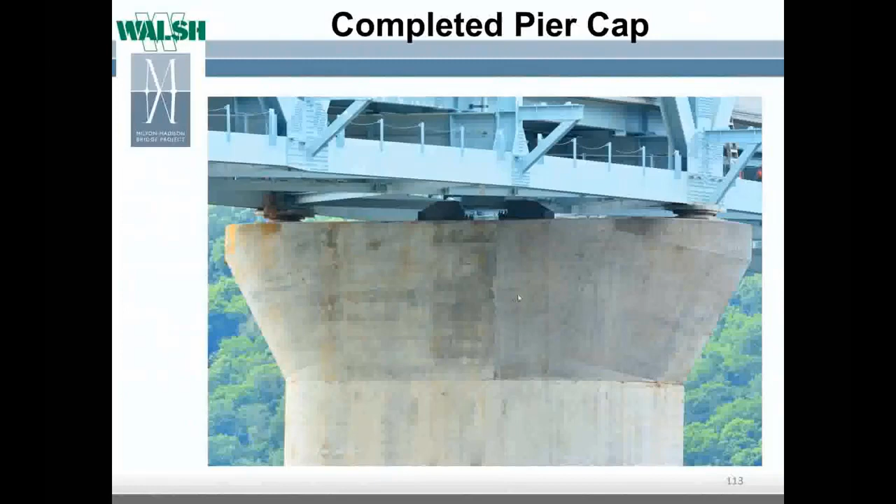Here is one of the last things we did to stabilize the pier design - installing the balance of the scour rock. The scour rock varied from 12 to 37 inches in diameter and was placed 12 feet thick around the pier, out as far as 45 feet, at the three river piers.

So here's the new Milton-Madison Bridge. Very pretty. We think it looks like what the owner was hoping for.

Lessons learned: when you work on the river, come prepared to battle worst case river conditions. We learned the hard way, but cutting your teeth sometimes.

Consider demolition methods when old is adjacent to new. I would not advise using explosive cutting charges in this application. I think the proper thing to have done, and maybe even have been required by contract, was to force the contractors to actually lower the sections onto barges and float them away for demolition.

Avoid shop painting a truss before assembly if at all possible. We had schedule constraints on this job and didn't have the luxury of time to paint the bridge once fully assembled. So we chose to shop paint it, and there was a lot of touch-up needed from the blast and from workers banging their tools against it, which became very costly for us.